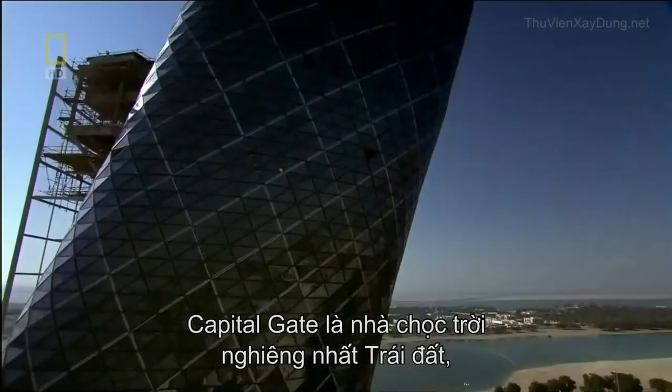Dubai is famous for its audacious engineering projects. But now, its neighboring city, Abu Dhabi, could surpass them all. This is Capital Gate, the most inclined skyscraper on the planet. It defies gravity, leaning at almost 5 times more than Italy's leaning Tower of Pisa. To make it stand up, it'll take some extraordinary engineering that could rewrite the skyscraper rulebook.

Situated on the edge of the Persian Gulf lies the Sheikhdom of Abu Dhabi. It's the largest and richest of 7 states that unified in 1971 to form the United Arab Emirates. Abu Dhabi is undergoing one of the biggest makeovers of modern times. Its ruler, Sheikh Khalifa bin Zayed Al Nahyan, wants to join the City Super League. And he's spending over $200 billion to transform his capital into a world-class business and tourist destination.

He's already spent a reputed $3 billion creating the most expensive hotel ever built. The Emirates Palace boasts 114 gold domes and is the height of luxury, where rooms cost up to $12,000 a night. And that's not all. He's built one of the largest and most opulent mosques on earth. Capable of accommodating 40,000 worshippers, the Grand Mosque boasts the largest carpet on the planet and the world's biggest gem-encrusted chandelier. But even these structures have not quenched his thirst for the extraordinary.

Now, the Sheikh wants a building so spectacular it will instantly become an international symbol for Abu Dhabi. The man appointed with the task of delivering this architectural icon is the Sheikh's cousin, His Highness Sheikh Sultan bin Tahnoon Al Nahyan. Architecturally, it will be a unique building, positioning Abu Dhabi as one of the cultural hubs around the world. And architecture is part of that overall inspiration and art.

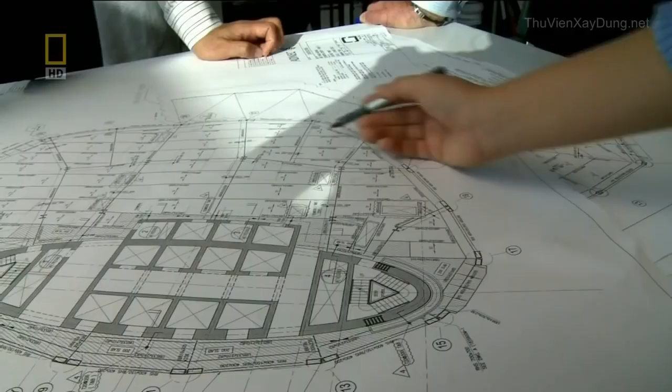It's a tough challenge. This is a land where extreme engineering is the norm. Neighboring Emirate Dubai has already built the world's tallest skyscraper, the 828-meter-high Burj Khalifa, and an iconic luxury hotel, the Burj Al Arab. Sheikh Sultan signs up a team of architects and gives them a clear brief, not to go bigger or taller, but to challenge the rules of architecture.

For Neil van der Veen, one of the concept architects, it's a unique opportunity. The spirit of the times in the UAE was that anything was possible. Really, you could do anything. We can do something in the architecture that will represent that Abu Dhabi is right at the cutting edge. The architects look for inspiration in Abu Dhabi's landscape. They find it in the wind-swept dunes and the rolling waves of the Persian Gulf.

We took this idea of wind and water, which are both dynamic, fluid type of rhythms of nature, and we said, how can we capture those in time? As a result, you get a much smoother phase. I was really very happy when we first saw it, because with such a building, you can get the first impression from the first few seconds.

The team come up with an extraordinary design. A tower that spirals out of the ground to 160 meters. Inspired by a desert whirlwind and the splash of a wave rising over the sand. This gravity-defying skyscraper tilts almost 5 times more than Italy's leaning Tower of Pisa. No single angle of this tower is the same as another. It's a structure guaranteed to amaze.

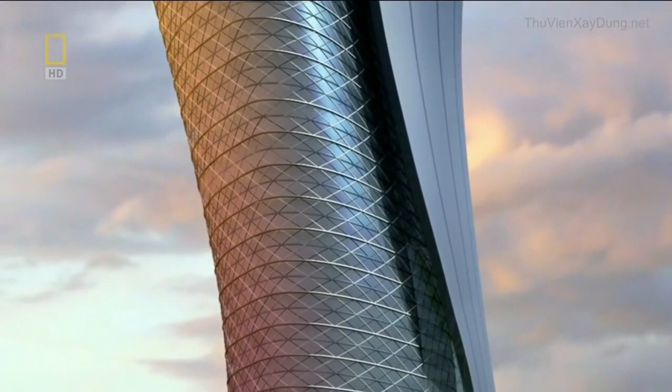But for maximum impact, this landmark skyscraper also needs a prestigious location. The Sheikh decides the tower will stand next to a monument of national importance, the Grandstand. Built by his uncle and founding father of the United Arab Emirates, Sheikh Zayed, it's used to this day for national celebrations. This monument and the skyscraper will link Abu Dhabi's future with its past.

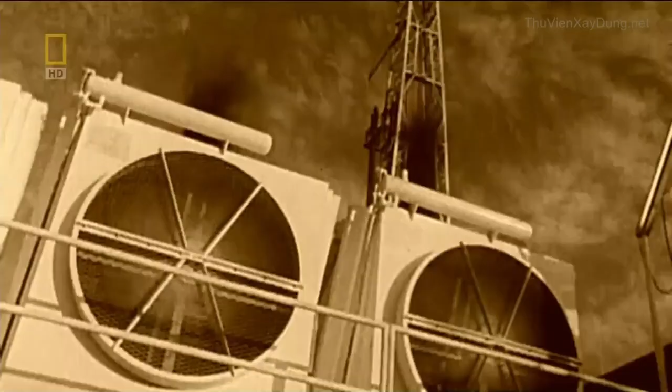Over the past 50 years, this land has experienced extreme change like no other. The discovery of huge oil reserves in 1958 set the wheels of progress in motion. Abu Dhabi's ruler Sheikh Zayed had a vision to unify the sheikhdoms and secure their financial future from Western dominance. He then set about using his black gold to create a city that rose out of the desert. Today, Zayed's legacy is all around, and now his son wants to leave one of his own. To transform Abu Dhabi once again, but this time to put it on the world map.

Sheikh Khalifa plans a new $2 billion business district called the Capital Center. Situated alongside the Middle East's largest business hub, the Abu Dhabi National Exhibition Center. It's the ideal location for an architectural icon. And inspired by its location, the new tower is named Capital Gate.

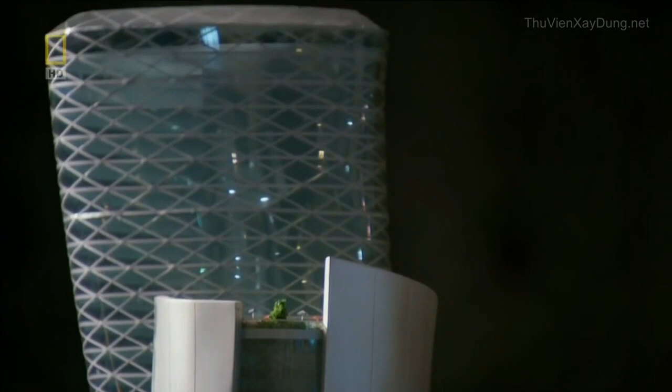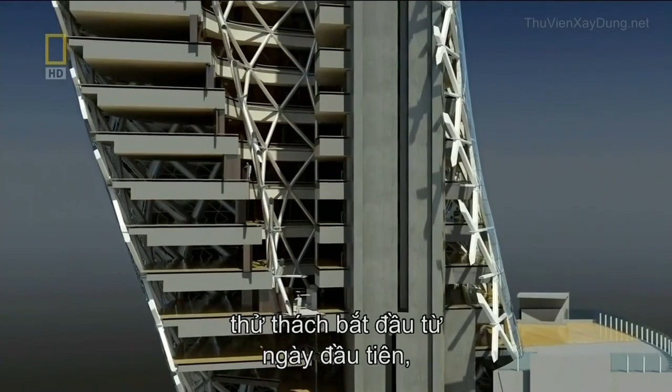Now, the idea must make the leap from the drawing board to the construction site. The only problem is, no one has ever attempted a skyscraper like this before. Everyone realized that this is a crazy structure to build, and how are we going to build it? To make Capital Gate's gravity-defying design a reality, it'll take some extraordinary engineering, and the challenge begins on day one. Its top floors overhang its base by 33 meters, creating huge forces that want to rip the building's foundations out of the ground.

At the construction site, project architect Tony Archibald is daunted by the task ahead. When I first joined the job, I was shown the drawings, and I kind of did a double take, and I wasn't quite sure that I got the correct understanding of the project, and it took me a few moments before I realized what we were about to undertake.

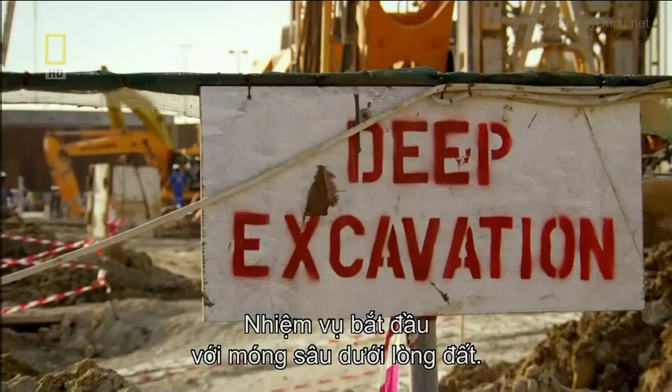Keeping Capital Gate upright is a huge engineering challenge. There isn't just one solution. To overcome the forces of gravity, it will take a whole range of pioneering techniques. But the task starts with the foundations, deep underground. On one side of the building, the weight is going down into the ground. On the other side, it's being lifted out of the ground. And that's due to the large overhang that we're having to deal with.

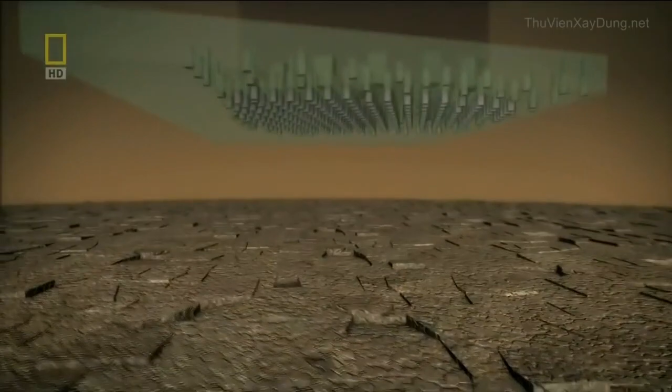The solution requires almost 400 concrete piles that work in 2 different ways. On the leaning side, half of the piles push the overhang's forces into the ground. On the opposite side, the remaining piles anchor deeper into the bedrock. They resist the stretching forces, trying to wrench the building out of the ground. Finally, to evenly distribute Capital Gate's forces into the piles, a deep concrete slab reinforced with steel is laid on top. What the foundations taught us is that every single aspect of this building has to be custom engineered.

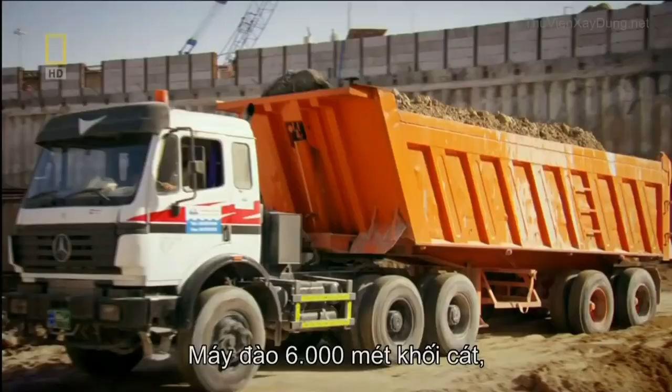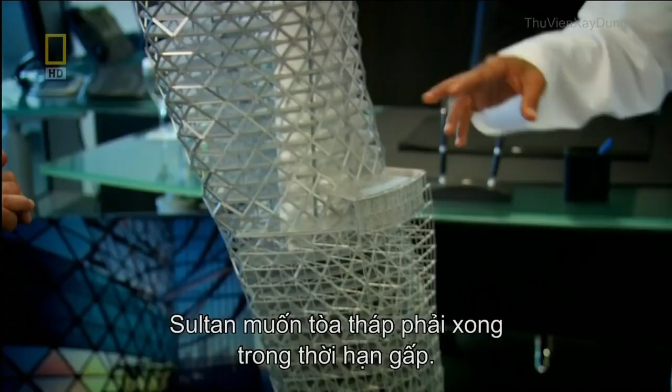Excavators dig out a colossal 6,000 cubic meters of sand. And over 8 weeks, hundreds of piles are driven into the ground. We had an awful lot of piles to put in very close proximity. It was a real difficult challenge. There can be no let-up on this schedule. Sheikh Sultan wants Capital Gate complete by an impossibly tight deadline.

With the foundations finished, building above ground can begin. But because of the dramatic lean, it will have to be constructed in a very different way to a conventional skyscraper. We realised once we'd done the foundations that this was going to be the first of many difficult problems. A normal skyscraper requires a solid core to hold it upright. But Capital Gate's curves will just crack and topple a standard core. Engineers must discard conventional thinking and devise a way to defy gravity.

Inspired by the nearby desert landscape and its wind-shaped dunes, architects have designed a curved leaning tower. But it'll take some audacious engineering to stop Capital Gate from falling over. Normal skyscrapers are built around a slim vertical core, which helps to channel the building's weight into the ground. There's so much overhang on this building, meant that a conventional core, there was no way it was going to work. You just can't build a straight core. It's just not strong enough.

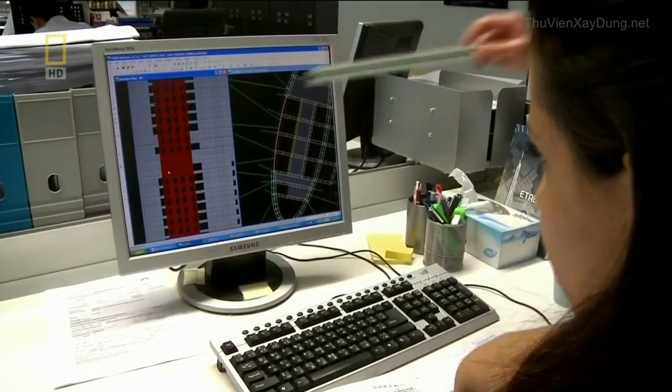Structural engineer Mona Vassi knows it's a serious problem that must be solved. When I saw this one, I thought it's impossible, it's not going to work. It's just some sketch, somebody left it somewhere. But I always think that the architects, it's easier for them to just draw something, but it's not easy for us to fulfill or satisfy their need.

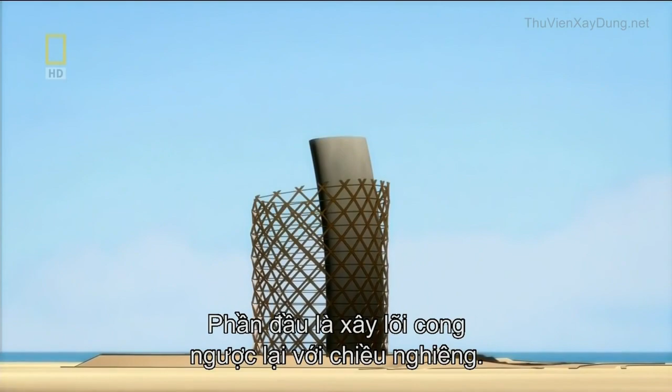The engineers developed 2 groundbreaking solutions. The first part of their plan is to build the core with a curve, bending in the opposite direction to the building's lean. As the structure grows, its weight pulls the core straight. In total, it shifts 350 millimeters, and the effect is significant. The concrete that would have been stretched by the overhang's pull will now be compressed and strengthened. You build it bent, and then as you add the slabs to the upper levels, it pulls it back into vertical. So basically that whole vertical core is in compression, and that gives it immense strength.

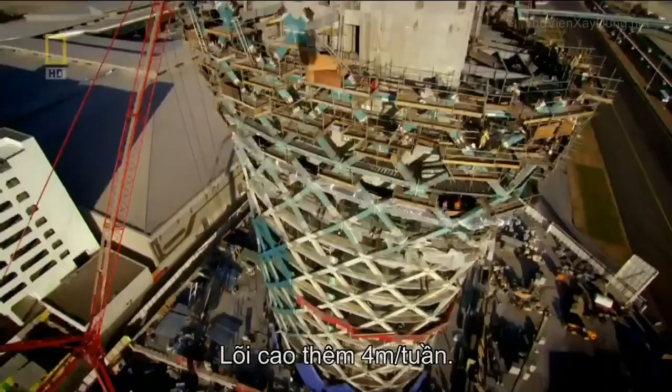The core grows 4 meters a week, and construction manager Les Fairchild is in charge of building it. This is probably the most complex core that I've come across. It's built at an angle and effectively the core holds the whole building up.

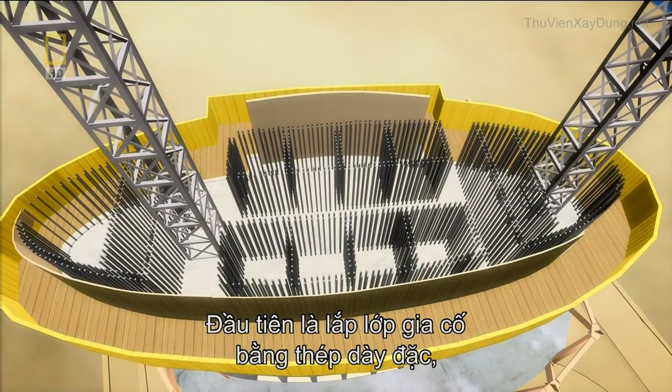The core is built using a technique called jump forming. First, a dense mesh of steel reinforcement is assembled. A mold then closes around the steel to form the shape of the core. The steel mesh is then filled with concrete. Then the mold or form can climb up the core wall for the process to start all over again.

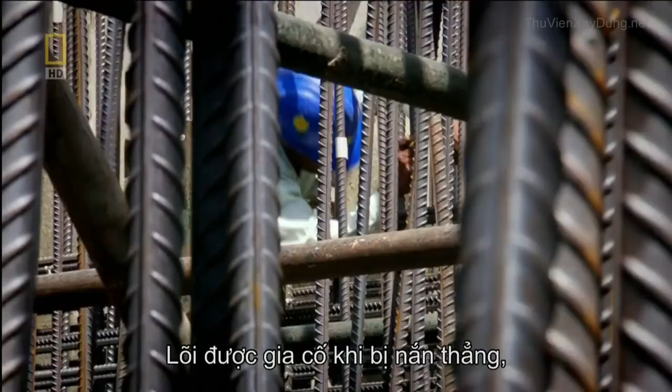Jump form is a hydraulic platform. Once we've cast each 4 metre level, we simply attach it to some runners and we jump it hydraulically up to the next level. The core will be strengthened as it straightens. But for the core to carry extreme loads, the concrete must be reinforced using steel rods called rebar.

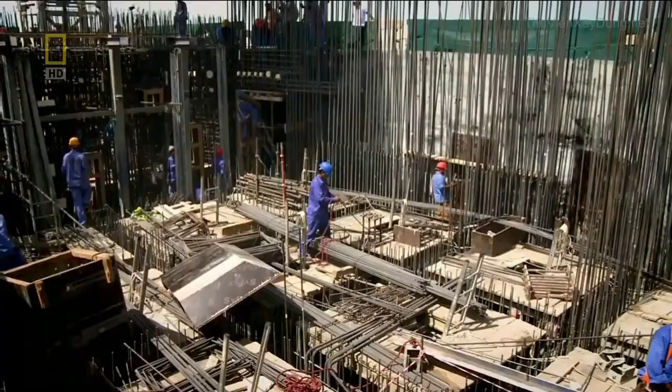The rebar is installed during the daytime, but temperatures of up to 50 degrees Celsius and concrete don't mix. It dries too fast and could crack. To set at the right speed, the concrete has to be poured during the cool of the night.

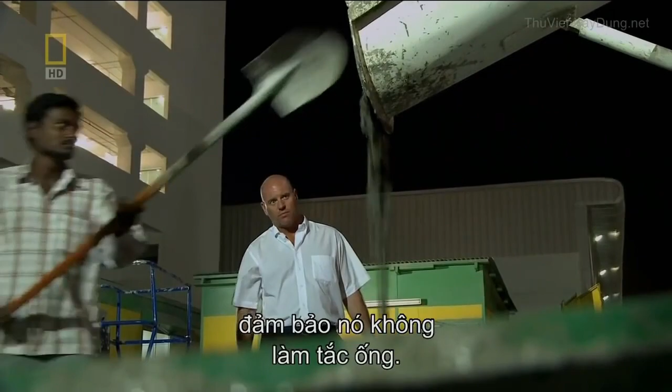As the core grows higher, the liquid concrete has to be pumped over longer and longer distances. So the consistency of every batch is first checked in a slump test to ensure it won't block the pipes. When you first see it coming out the wagon, you can usually tell whether it's a tight mix or whether it's a loose mix, and that's what we're testing for really in the slump test.

We simply make a cone, lift the cone off, and depending on how much it reduces in height, tells you exactly what the slump is. The one we just witnessed is 215 millimetres, which is within the specification, so that's good to go.

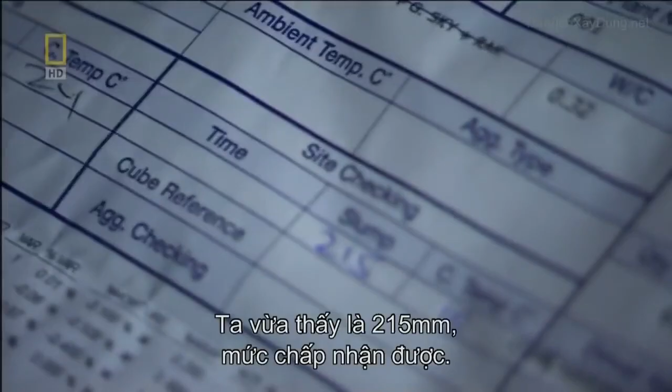Whilst the truck drives to the pump, Fairchild needs to get onto the core. He can take the stairs, but 90 metres up is a long climb. He knows a much faster way. Crane lift.

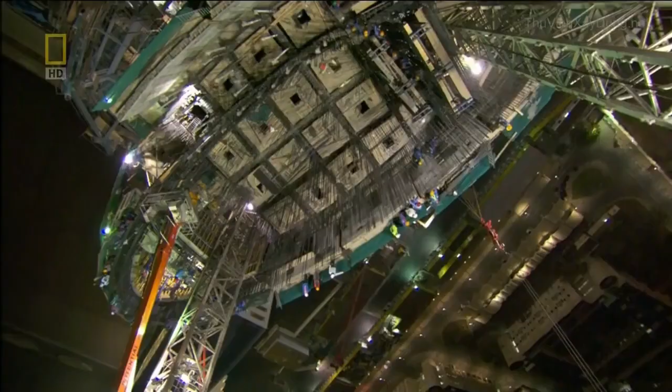It's going fairly well. We've had a nice continuous supply of concrete and we're now pumping it up to the upper levels of the building. And the lads are just steadily working away. They actually work from one side to the other in metre deep layers, so they're doing everything right. It's always exciting when we pour concrete. It means it's another achievement really. We're going up another level.

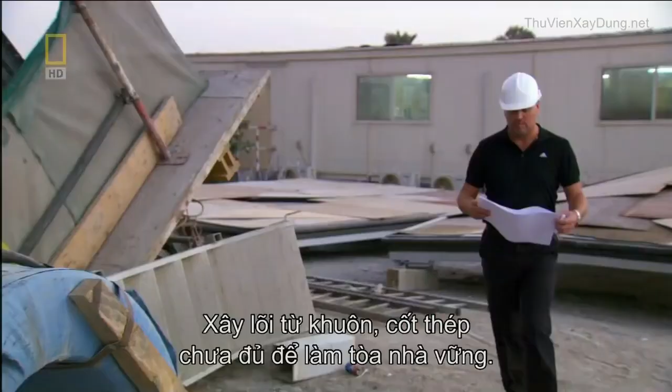But building the core out of alignment and packing it with rebar still isn't enough to stop gravity toppling Capital Gate. What we came up with is a post-tensioning solution where we introduced much more reinforcement into the core wall and then used the tensioning process. Basically that was done by introducing high tensile strands to the centre of the walls.

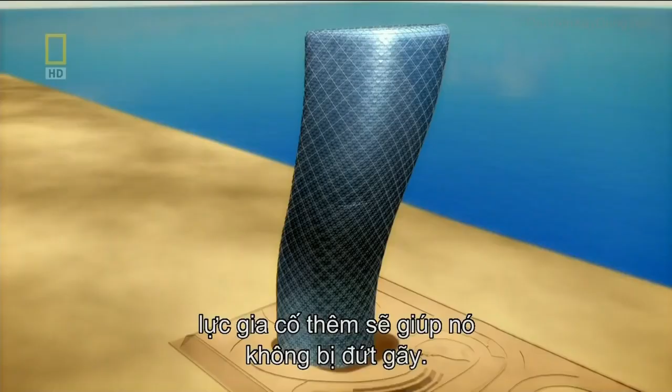When we reach the designated height, we simply apply tension. We're actually stretching the tendons that fall through the wall and we're actually pulling them tight, and that's done by a tensioning machine. So effectively, when the tension is complete, when the load was applied to the core it would stay intact and the additional reinforcement would prevent it from falling over.

To post-tension the core, 146 steel tendons are threaded vertically through the concrete. Each tendon is 20 metres long and runs through 5 floors of the building, overlapping each other for maximum strength. When the tendons are stretched, the stress counteracts the pulling force created by the massive overhang, stopping the concrete from tearing apart.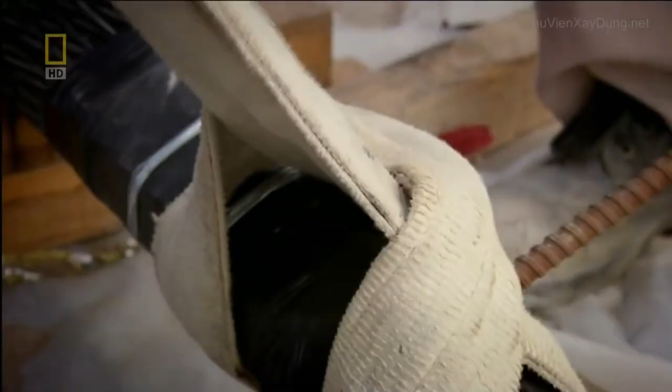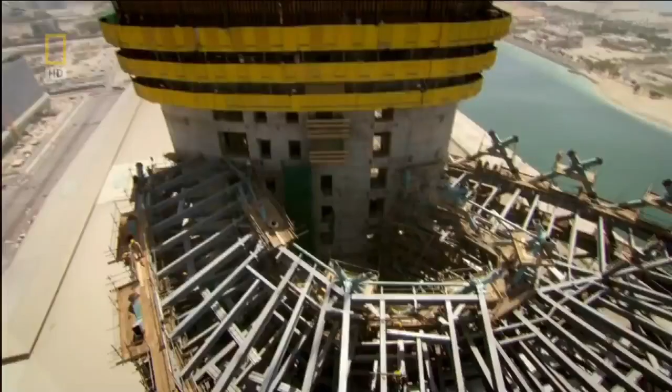On site, the team are post-tensioning the core. But no one has ever attempted this vertically in a skyscraper. The long tendon is lifted to the top of the core. The team used the steel tendon's weight to force it through a duct already cast through the core. Once the tendon is in position, the team lock off both ends, ready to tension its individual strands.

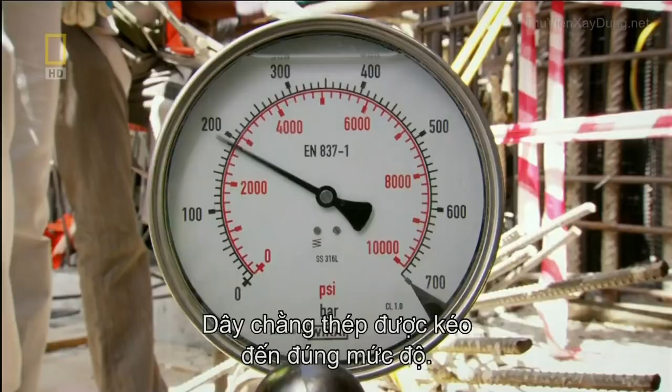A hydraulic jack clamps around one strand at a time and stretches it. It's equivalent to about 5 family cars pulling on one end of the rope. With the steel tendon now stretched to the right stress level, concrete pouring can continue upwards.

The quantity of cable that's been used is approximately 120 tons and 120,000 metres in length. It's about 44 times the Golden Gate Bridge. This process is repeated over and over and means the core should withstand the huge loads generated by Capital Gate's extreme overhang.

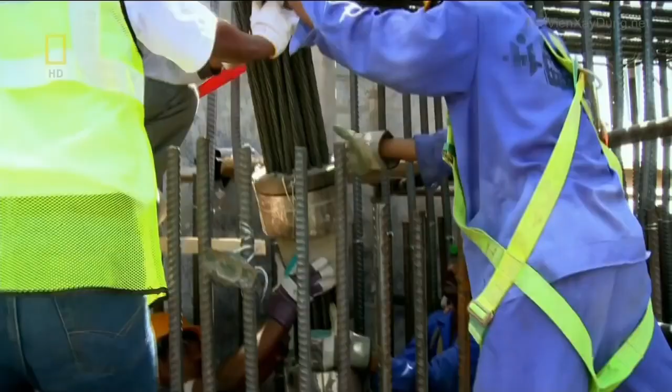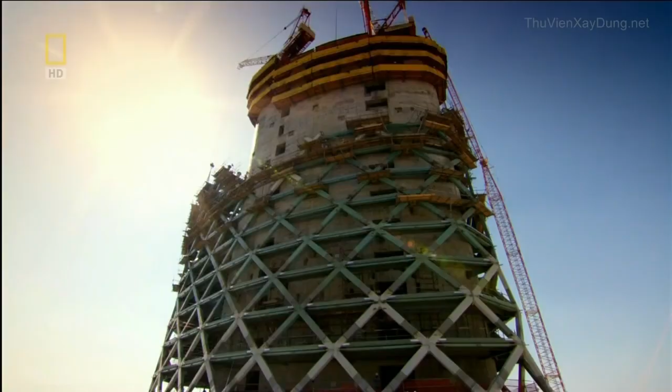But now, an even greater challenge must be tackled. The building's twisting, leaning design must somehow be turned from theory into reality. And once again, it'll mean bending the rules of architecture. To create Abu Dhabi's architectural icon, Capital Gate needs an exterior curved leaning frame. But once again, the building's extreme tilt creates a problem.

The shape of the building with this very pronounced overhang meant that traditional skyscraper building solutions just weren't going to work. There was no way. The building design requires it to be thin to maximize floor space and allow for huge panoramic windows. Irfan Ahmed is one of the engineers who has to find a solution. For structural engineers, always it's challenging to accept the architectural requirement, you know. They always want thinner and thinner and thinner.

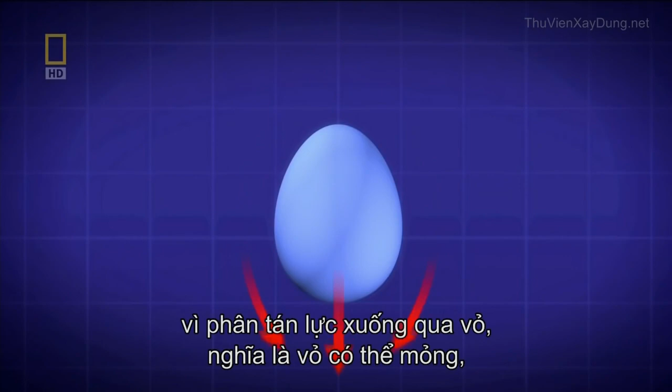Surprisingly, the humble egg could help with this engineering dilemma. It is essentially a skin of structure around the outside of the building, not unlike an egg. An egg can withstand huge loads because it evenly distributes forces down through its shell, which means the shell can be thin, creating more space inside. So it's very, very thin, it's very, very strong. If I try to crush this egg, you can see that it's actually amazingly resilient. So let's see how resilient.

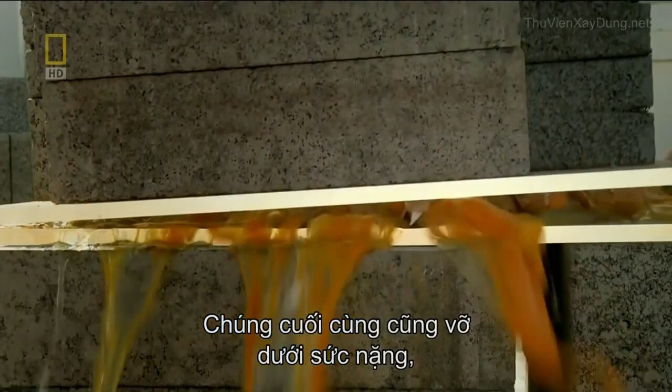Here I have 170 eggs laid out, and we're going to put load on top of these in the form of breeze blocks. Moment of truth. So far, so good. Each one of these blocks weighs 15 kilos. So we've nearly got half the weight of a car on here now, on our 170 eggs. Let's see how far we can push this. That's 30 blocks, and I think it's about to go. It's going big time now. This is it. This is the end. These eggs eventually crack under the weight, but they withstood over 450 kilos, half the weight of a family car.

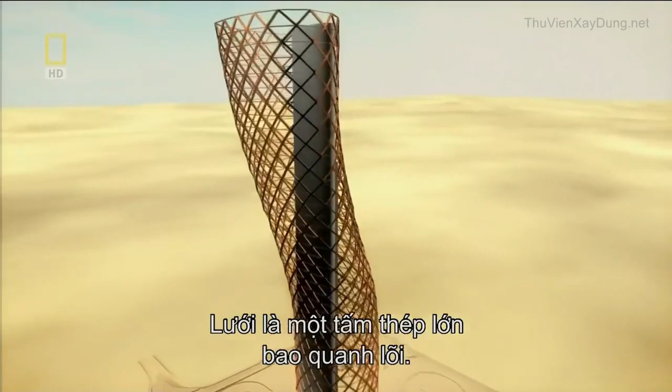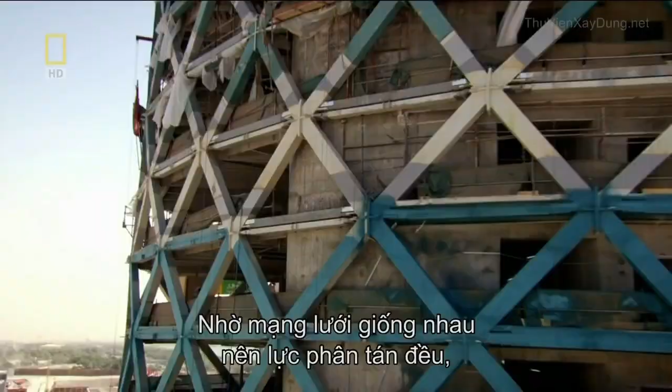Capital Gate can't channel forces with eggshell, but it can use the principle of how it works, using a diagrid. A diagrid is a giant mesh of steel that wraps around the core. Steel beams connect to a node or joint to form a cruciform section. 720 uniquely shaped sections link together to form the thin but immensely strong diagrid. Working together, these cruciforms equally distribute the forces down the outside of the building. The way it does that is by making a uniform net, so that the forces are very evenly distributed, and that means that we can get away with slenderer sections.

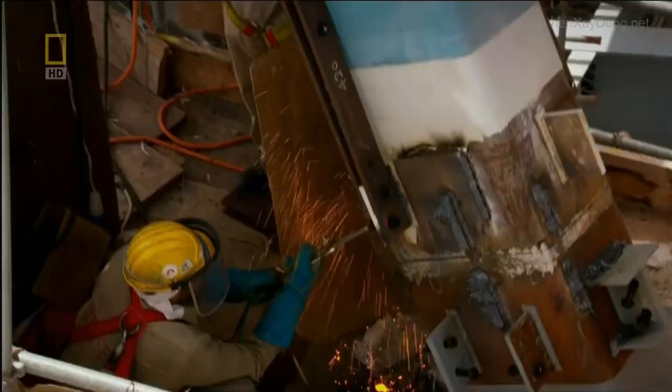On site, a team of 240 steel fabricators assemble the diagrid. They've built the easier straight part of Capital Gate's base, but now the structure is starting to lean, making installation even more challenging. Each cruciform, weighing up to 16 tons, has a unique geometry and must be crane lifted at a precise angle. If the diagrid is not assembled with millimeter accuracy, the mesh will not channel the loads and the structure could be weakened.

The engineers must communicate closely with the expert steel fabricators. They design and manufacture the diagrid 150 kilometers away in the neighboring emirate, Sharjah. Here, cutting-edge construction is the norm. They've built one of Malaysia's Petronas Towers and Dubai's iconic skyscrapers, the Burj Al Arab and the Burj Khalifa. But Capital Gate's revolutionary design pushes even these experts to the limit.

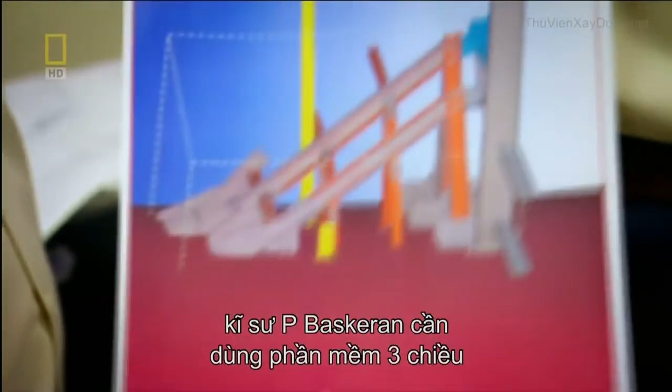On the planning floor, project engineer P. Bhaskaran and his team need bespoke 3D software to tackle the building's highly complex diagrid. The 3D modeling is done, and any unforeseen criticalities will be very clearly identified in the 3D model. Each one of the 720 cruciforms is precision engineered, not only to channel huge forces, but to connect with millimeter accuracy to the neighboring cruciforms and the glass facade. But to measure their exact angles, the team used some old-school technology: chalk. It might look unsophisticated, but it's highly accurate, ensuring all the elements will join together.

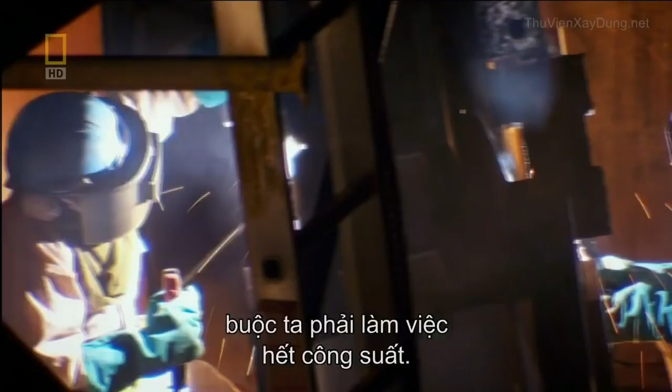To keep up with construction, the factory must produce 18 cruciforms every week. Constructing such a huge building, and a critical building within the short span, without working 24 hours, it is absolutely not going to happen. As the skyscraper reaches new heights, the long hours start to pay off. This design pushes the diagrid technology to its absolute limit, and in fact far beyond what's ever been achieved so far. Even in your dreams, you're thinking about this project. So once you see the structure coming up, you forget all the long hours you spend and all the sleepless nights.

A colossus is fast emerging from the Abu Dhabi sands. Now, this leaning tower must be clad with a glass facade. And as always with this gravity-defying structure, it's going to require some revolutionary engineering.

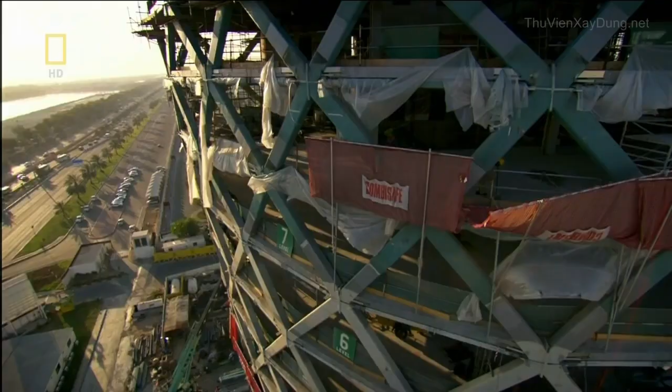Glazing Capital Gate's leaning curved frame is a major problem. Covering its unusual contours with curved glass will blow the budget. So the skyscraper's curves must somehow be clad using cost-effective flat glass panes. Fortunately, ancient Greek geometry can help.

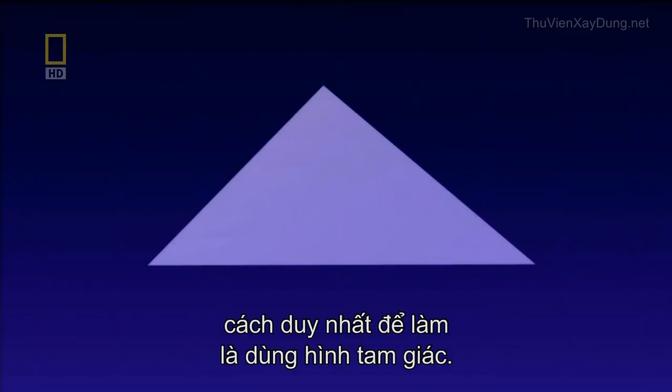Because you've got a complex shape, it's an organic shape, it's a curved shape, the only way to model that with straight lines is to use triangles. Triangular panes can pivot in 3 directions, and when joined together can cover complex geometric surfaces. But because every angle of the building is unique, it'll take 26,000 triangular panes to form the facade.

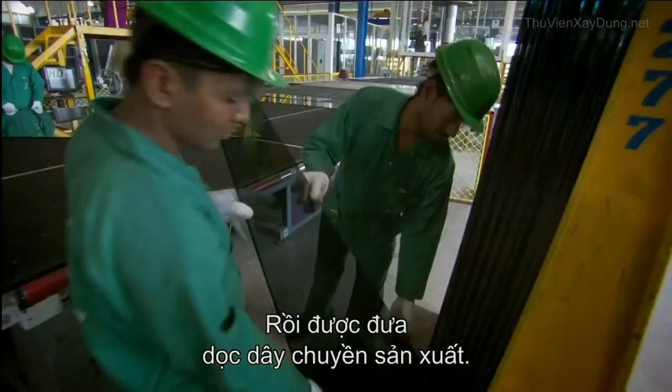With so many glass triangles to cut, the local glass factory springs into action. Each pane is scored by an automated diamond cutter to an exact pattern. The triangles are then sent along the production line. The team is under constant pressure to deliver enough glass to the site. Hey, this side, 2 guys, hold it.

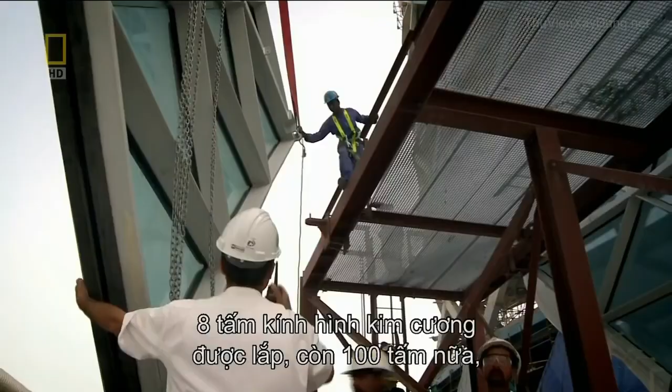After several weeks, 8 diamonds are in place and another 100 standing by. But the glass design is so unconventional, it still has to pass a number of tests to prove it's up to the job. Because we'd already started the glass installation, the results of this test were absolutely key. Each panel is stacked one upon the other. So if we'd had any kind of problem, we would have had to unstack them, which would have had disastrous consequences for the program.

This is no ordinary glass skin after all. Capital Gate's core straightens as it grows. The skyscraper will not stop moving until after completion. Normal glass facades can accommodate minute movements caused by wind and temperature changes. But to stop the glass shattering and keep the building watertight, the panels must be designed to shift by up to 20 millimeters. The scale of that kind of movement is almost unheard of in glazing systems. It's a vast amount of movement.

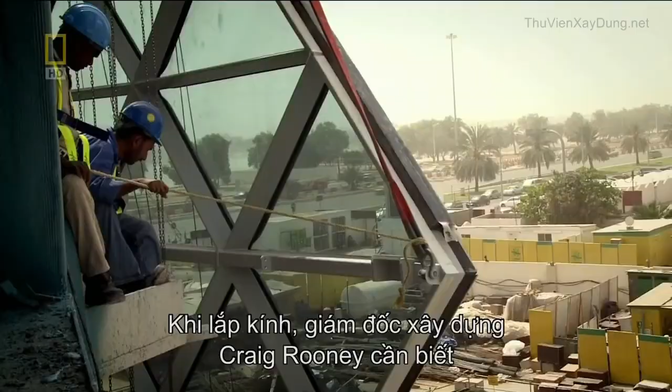With glass installation ongoing, construction manager Craig Rooney needs to know the panels will perform. We don't want to get to the top, we've done it, we've installed it, we think we've done a great job, and then it all leaks. The panels must be tested to the limit at a Dubai laboratory. A plane engine and many litres of water simulate worst-case scenario weather.

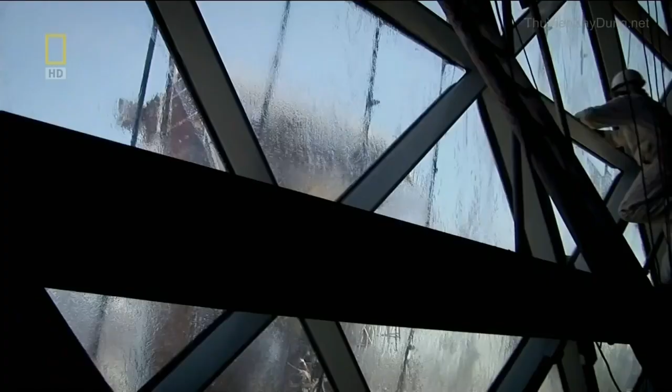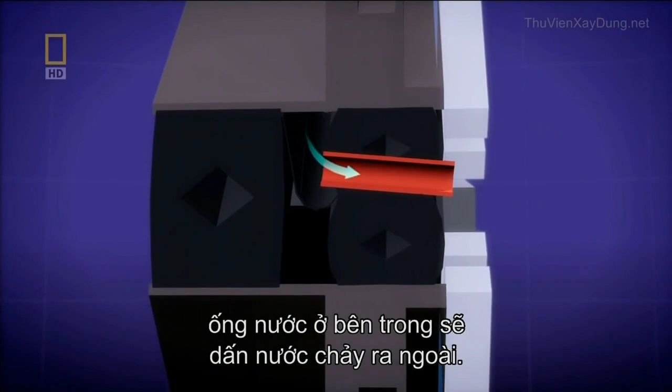Now the moment of truth. Any leaks could be a disaster. And it's bad news. The first time we got a full water test, we had a leak. The fact that we had a leak was devastating to the whole team and very alarming. The diamonds connect to each other by a bespoke two-layer seal. The flexible spongy seal allows the diamonds to move and keeps water out. But if any water does seep through the outer seal, drainage tubes fitted at intervals let the water flow away.

The panel has failed the test. Water has flooded inside and penetrated the inner seal. If it was a fundamental failure, we're back to the drawing board, so the cost and the budget and the program all go completely out the window. The panel is examined. Answers are needed fast. Fortunately, it's not a design failure. They discover a drainage tube is only blocked with sand. The problem resolved, installation can step up a gear.

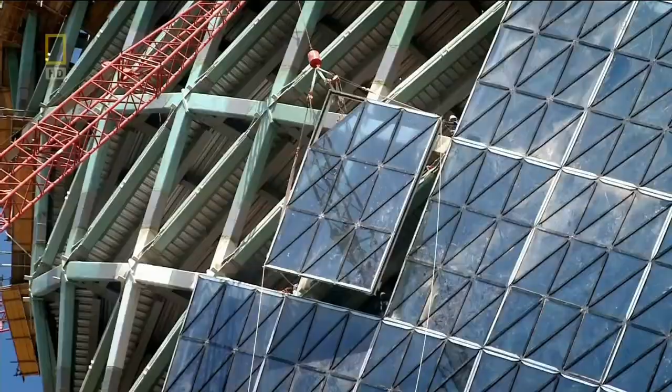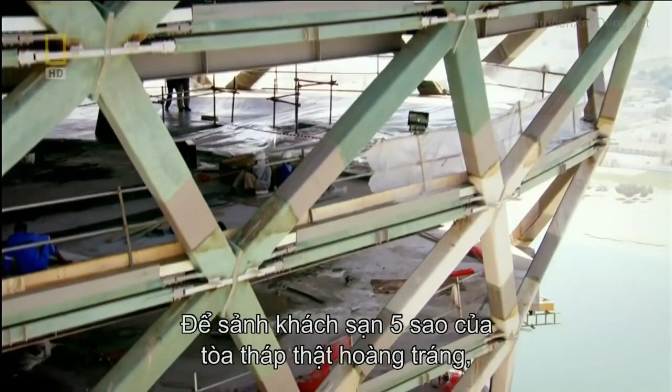But as always with this audacious building, one problem is solved and another is just around the corner. To give Capital Gate's five-star hotel lobby the wow factor, architects again plan to push the design to the extreme. Now they want to build an infinity pool and a restaurant, hanging 100 meters above the ground.

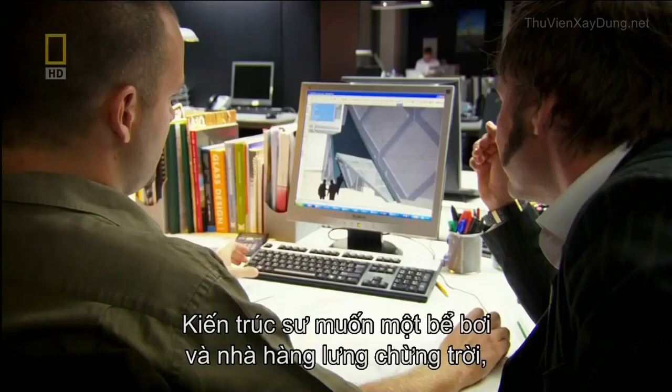18 months into the build, Capital Gate's design is about to give a new slant on high-rise living. The architects want a pool deck and restaurant suspended in the sky, but it's an engineering headache. There's so many requirements that architects had that really put us in so much trouble as engineers. But you want to make sure you have a safe structure. The design calls for a two-story extension, hanging without any visible support. But the pool's water alone will weigh 150 tons.

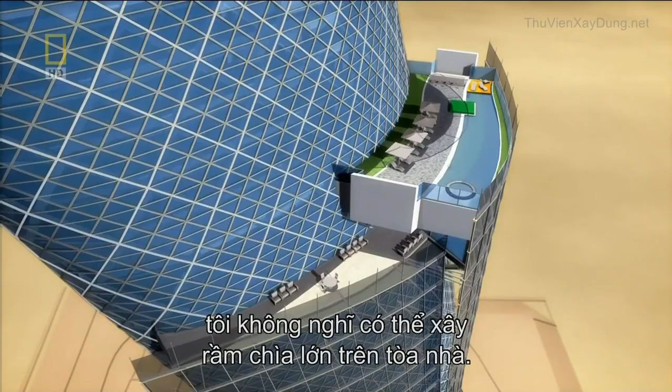The structure's huge mass means it needs reinforcement. We needed some supports from below, otherwise there was no other solution. I don't think you can have a cantilever that huge on this building, no way. The design will only work if it's underpinned with 22 steel struts. They will carry the loads back into the building. But the struts must also look delicate to meet the architect's aesthetic demands.

On the construction site, 90 meters up, the pool and restaurant is taking shape. All of its structural elements are in position, except one. The team are raising its last 6-ton floor beam.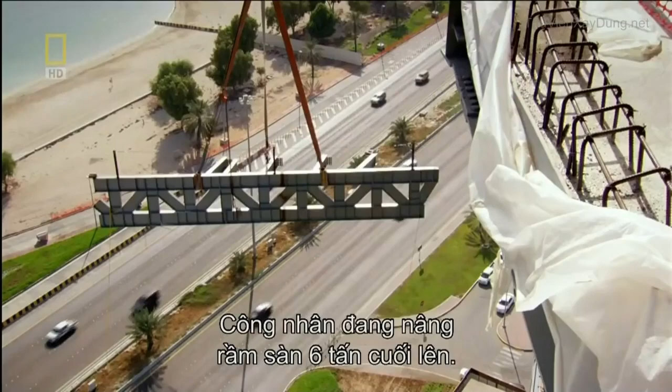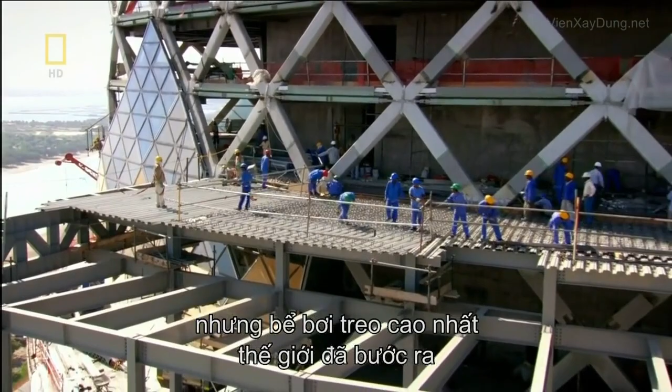It's taken many crane lifts, but one of the highest suspended swimming pools in the world has made the leap from blueprint to building. See all those lines that you just drew? They're actually drawing the same thing for you, but with a crane. But the feeling is indescribable.

And the structure's muscular struts and connections are also elegant. The idea behind these junctions is that they behave like the insects that can walk on water. They're sufficiently light that the surface tension keeps them above the water. So these little brackets dissipate the forces from all that weight.

Capital Gate is fast becoming an Abu Dhabi landmark. But the taller it gets, the more the weight of its upper floors is a problem. The skyscraper needs to go on a diet. And this time, the architects come up with a clever solution. The building has lots of visual surprises.

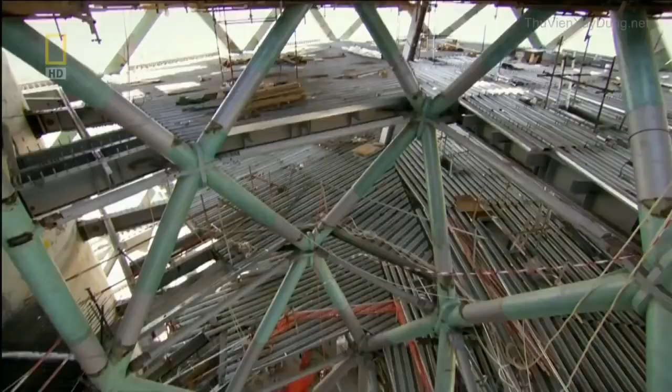And one of the most important ones of those is the internal atrium. It's a kind of a light well that brings light from the sky deep inside the building, and it extends over half the height of the building. So it starts out very, very small at the bottom and opens out in a big funnel. This cavernous hole is good news for reducing weight and minimizes forces.

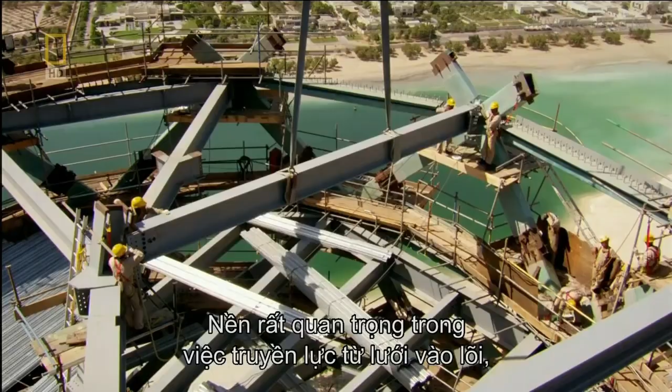But the atrium is a double-edged sword. The floors are critical in transferring loads from the diagrid to the core. A giant hole through 18 floors means these loads must find another pathway. It's a very, very big hole in every single floor plate. So our engineers really have their work cut out.

You don't want to have an opening in your floor. You want to have more concrete, reinforced concrete, to transfer these forces. The forces need to flow away. And the solution is pioneering. An internal web of steel mirroring the external diagrid. This is the first time we've ever heard of this being done. The internal diagrid is actually a fundamental part of the structure.

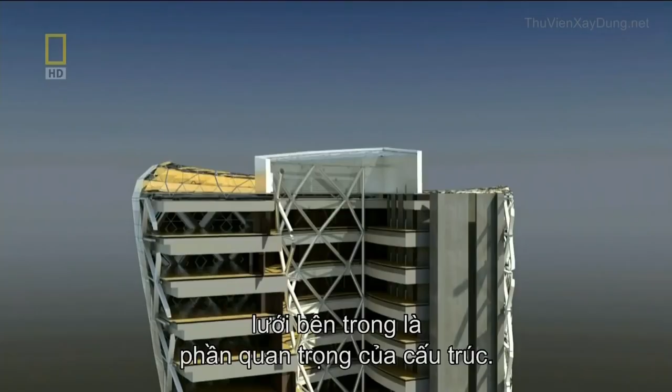This funnel-shaped internal skeleton carries the forces of an 18-story building down to its tapered base and into the core. But the loads are extremely high for such a small area. To stop the atrium punching through the core wall, the concrete needs protection.

The answer? 6 giant plates of steel that brace the connection to the core wall. The connections are really a wonderful, wonderful piece of engineering. They're 8 meters high. They span 2 floors and they connect back into the core. The atrium's near completion brings Abu Dhabi one step closer to achieving an iconic landmark.

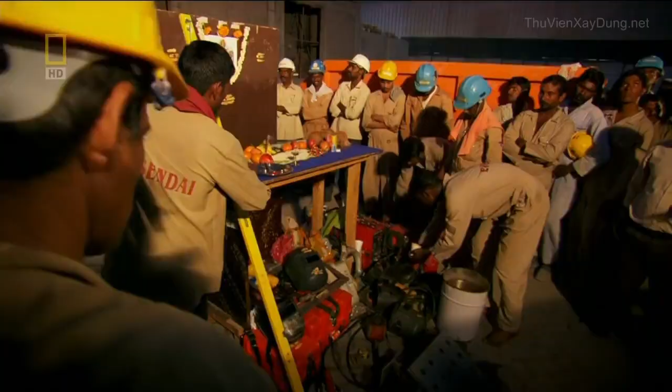But as the sun goes down, this isn't the only celebration underway. On site, the Indian steel team are holding an annual blessing to the Hindu god Lord Vishwakarma, the protector of architects and engineers. Their livelihoods depend on staying safe, and although they use safety equipment and are highly skilled, working with huge sections of steel at height is never risk-free.

We pay our respect to God and get the blessings from the God. We do that for the safety of all our workers and for the proper completion of the job. Every trade of workers we take, the basic tools they are using on site, that has to be just kept in front of God, and the workers, they feel themselves that they are in safe hands. The tools are now blessed, and the steel team's morale is high.

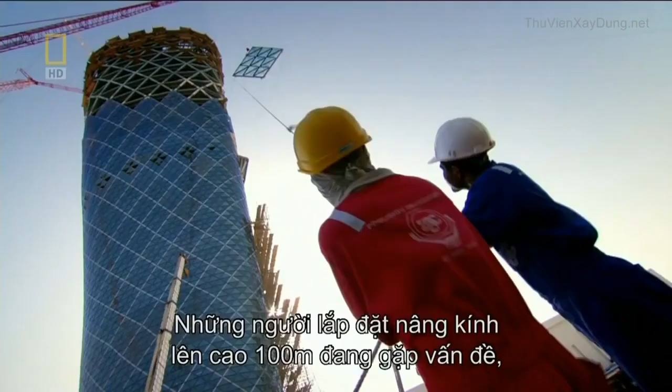But the glass installers, lifting diamonds to over a height of 100 meters, are getting the wrong kind of lift from Abu Dhabi's highly unpredictable wind. If the wind is too strong, then you can feel this in your hands when you hold these diamonds by rope. I always get nervous if I see the panel starting turning. And this makes me always a little bit afraid when I see diamonds going up and starting moving.

Meyer has to act quickly, or this 4-ton diamond could smash into the building. Not for the first time, lifting glass is delayed by changeable weather. At this rate, Meyer won't install the remaining 107 panels in time. But Abu Dhabi's wind isn't the only problem the Capital Gate team face. A last-minute design request comes in from the Sheikh's office that could have serious implications.

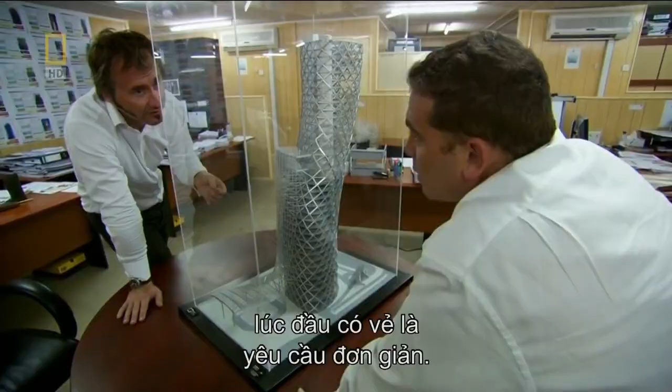With just 6 months to go to completion, the Capital Gate team should be on the home straight. But those plans may have to be put on hold. I had a telephone call saying that we had to put a helipad on the roof, which I thought was a joke, but I was astounded that we got this at such a late point in the project. Integrating what will be Abu Dhabi's highest helipad atop one of the world's most daring skyscrapers at first seems a simple request. But it actually poses 2 serious problems.

It'll create new forces that must be absorbed by the already strained core, and unpredictable wind flows that can cause potentially lethal flying conditions. You get a thing called wind shear, tipping the whole helicopter onto its side, and this is a very real and very dangerous risk. These rapid wind changes, known as wind shear, can affect the lift on helicopter blades. Aircraft can be blown off course, or literally fall out of the sky.

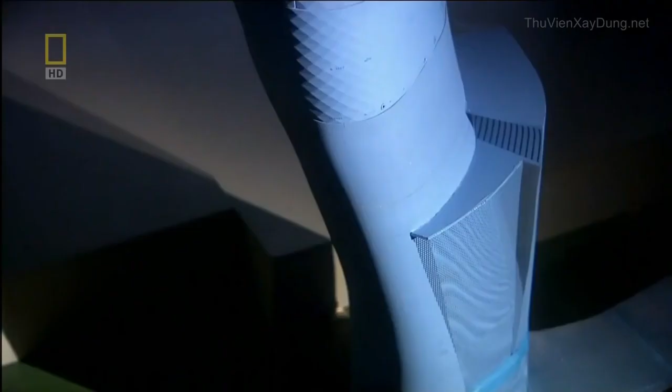There is no way that we could have any margin of error on the safety. The only way we could predict what the wind shear would be like on the top of the building was to model it in a wind tunnel. In London, England, a scale model of Capital Gate is put through its paces in a high-tech wind tunnel. Just as the team fear, within seconds, wind shear conditions appear. Air currents are flowing over the top of the building, but then separate from the surface, spiraling inward to form a realm of turbulence.

Wind engineer Leighton Aurelius knows the consequences could be serious. If the pilots lose control in this random ball of energy here, they may in fact end up crashing onto the helideck, or even worse, onto the tower itself. I'm sure that can occur. But that's not all the wind tunnel test reveals. Wind impacting the helipad is also creating huge suction forces. We're talking about very large forces here wanting to pull the helipad off the top of the building. Something in the realm of several large trucks or big rigs trying to pull this helipad away.

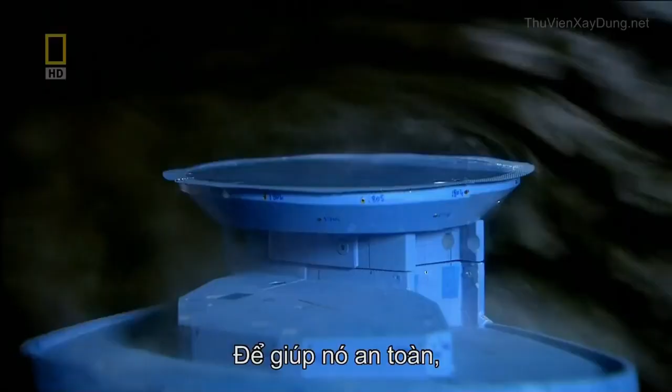To make the helipad safe, Aurelius and his team have to go against conventional thinking. We didn't think that lowering the helipad was actually going to be the optimum design, but we see reduced loading on the helipad as well as safer conditions for the pilots to land in. Lowering the helideck to just 2 meters above the roof dramatically decreases the wind shear threat, and means Capital Gate's core will withstand the additional loads.

We're relieved, frankly. The tests have actually confirmed now that we can actually have it in our original design position, which is very low, which will mean that the profile on the skyline is exactly where we want it. But it'll take another 5 months to just draw up the helipad's blueprints, and a crane must be left behind to build it.

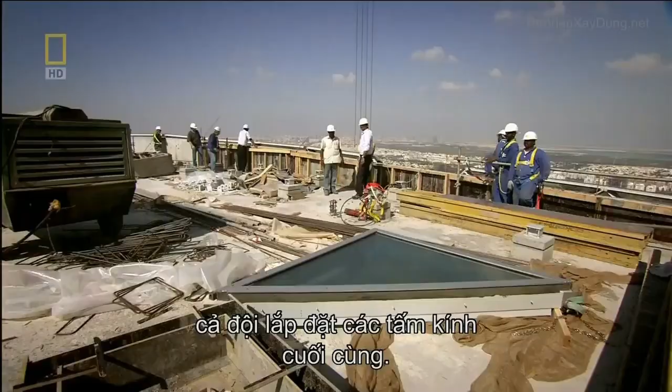Now, with only weeks to go until zero hour, the team are installing one of the last glass panels. It's a moment that once seemed a long way off. In my office I have a plan of all the diamonds we have to install, and in the beginning it looked like I'm in jail and I'm marking the wall with marks for each day. And so at first I felt I will never finish this project. Just 10 months since the first diamond was fitted, the facade now shimmers in the sun.

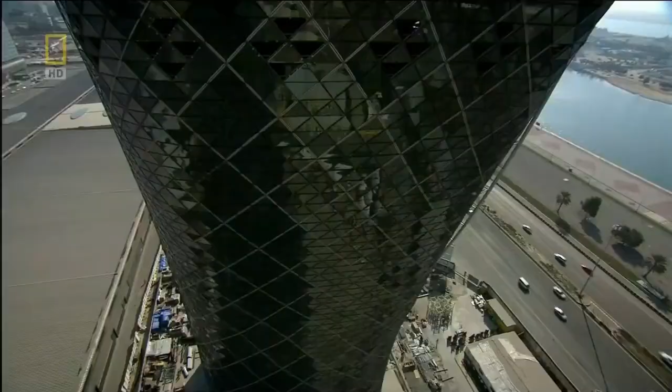Capital Gate's internal fit-out will take another year. Only then will its 5-star hotel and Abu Dhabi's most unusual office address be open for business. But against the odds, the team have created one of the most extraordinary megastructures on the planet. Capital Gate twists and spirals out of the ground, soaring to a full 162 meters. It's taken nearly 6 million man-hours to construct, and its overhang is spectacular. You see the building and you stand underneath the overhang. It's extremely impressive. It's a fantastic feat of engineering.

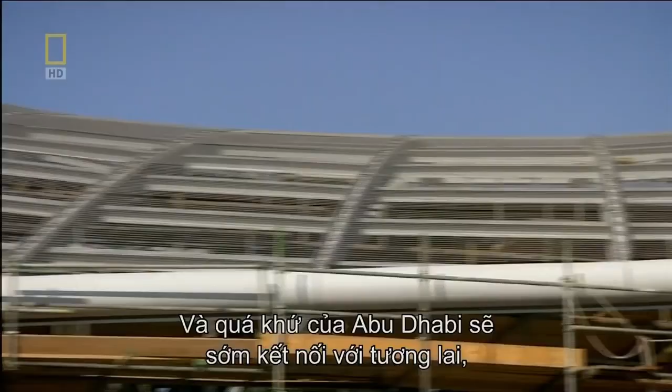I feel as though I've been here an eternity, but it's probably been the quickest 2 years of my life. It's been an amazing journey and we've learned so much. And actually I think we've demonstrated that some things that looked impossible or even ridiculous were actually possible. And Abu Dhabi's past will soon be physically linked to its future by a wave of steel that'll rise over the grandstand and splash up the skyscraper's mirrored glass. Abu Dhabi is a fascinating part of the world to be at the moment. It says to people we can step outside of the box. We don't have to follow the rules.

With the 2010 World Future Energy Summit just weeks away, Sheikh Sultan can be sure Capital Gate will show the world what Abu Dhabi is capable of. This building is really iconic. It catches the spirit of Abu Dhabi and will be part of the postcard image of Abu Dhabi. The team have achieved what some thought was impossible. A leaning tower that claims the world record for the most inclined skyscraper on Earth.